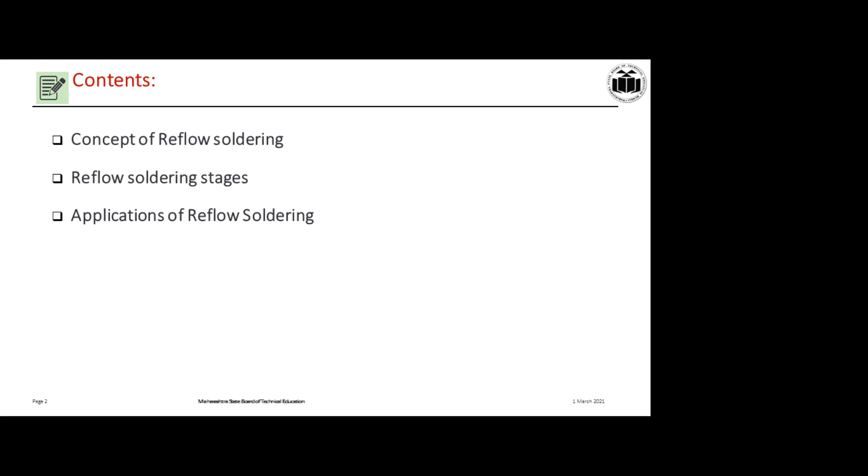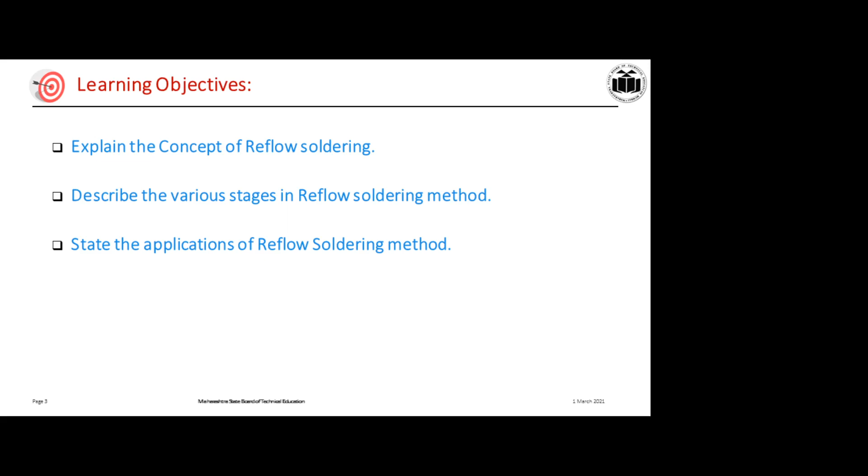Now in this presentation, we will see the contents as concept of reflow soldering method. Second, we will see the various stages in the reflow soldering method. And third, application of reflow soldering method. Now here are the learning objectives of this presentation. Here we are going to explain the concept of reflow soldering. Second, we will describe the various stages involved in reflow soldering method. Third, we will describe or state the applications of reflow soldering method.

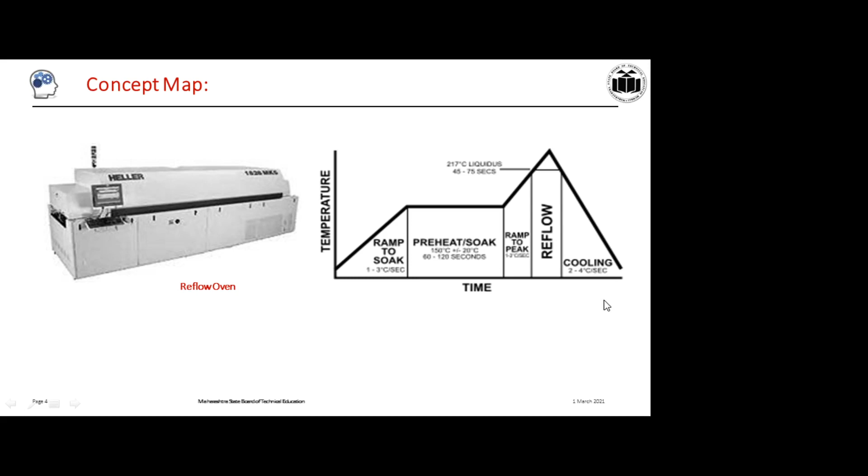Now here is the concept map. What is actually the reflow soldering? Now this reflow soldering is carried out by using the reflow oven. So at the right hand side you can see the graph of time versus temperature. So this will indicate the various stages' temperature for the reflow soldering method when we do this with the reflow oven. So there are 5 different stages in the reflow soldering method by using the reflow oven that we will see next in detail.

So what is the reflow soldering? It is the most widely used method for attaching the surface mount components on the PCB. It provides reliable soldering for a huge variety of components and pad sizes, while being easy to monitor and control. Infrared reflow soldering has been used for many years in PCB assembly areas. Now it is able to provide very high quality soldering by using this reflow soldering method, which is the need of today's electronic production area.

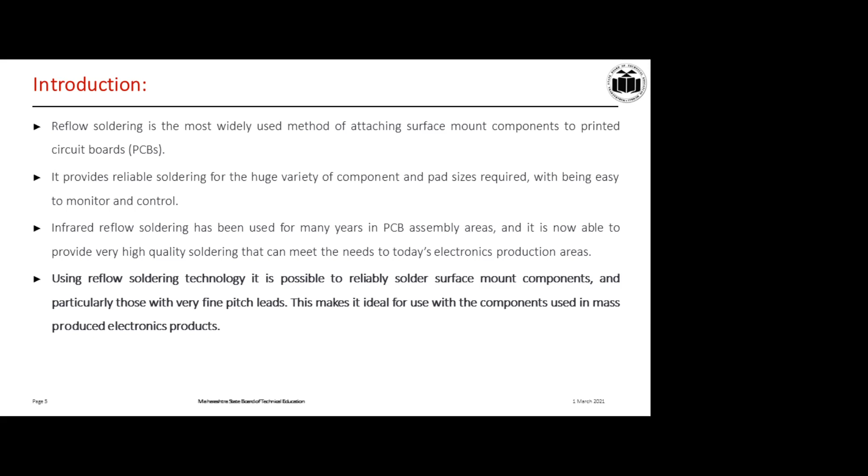Using reflow soldering technology, it is possible to reliably solder the surface mount components, particularly those with very fine pitch leads. This makes it ideal for use with the components used in the mass production of electronic components.

So these are the requirements of the reflow soldering process. So what are the key aspects? The first is a suitable machine. So to get the effective reflow soldering process, the first requirement is that we have to deal with the suitable machine. Second, acceptable reflow profile. Third, a PCB or component footprint design is required. Fourth, carefully printed PCB using the well-designed stencil. So by using a well-designed stencil, you can go for the reflow soldering method.

Fifth, repeatable placement of surface mount components. And the sixth, good quality PCB components and the solder paste. So these are the basic requirements of any reflow soldering process. We need to get these requirements satisfied.

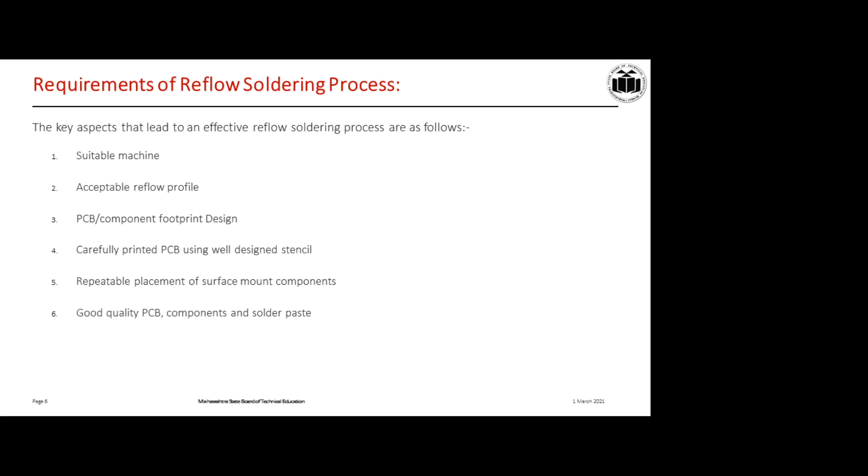Now let us see what are the various stages in this reflow soldering method. So there are various types of reflow soldering machines available depending on the required line speed and the design or the material of the PCB assembly to be processed. So based on that we can select that particular reflow soldering machine. Now let us see what are the different stages in this reflow soldering method.

So the first stage is the preheat. Now what is the need of this preheat stage? Here the board needs to be brought steadily up to the required temperature. The board is the PCB board. So we have to maintain the temperature for that particular PCB board. If the rate is too high, then the board or the component may be damaged due to thermal stress. So we have to be very careful. If the board is brought to the temperature too slowly, then the board may not reach the required temperature. So in preheat, the accurate temperature condition has to be satisfied.

The second step is the thermal soak. Now when the board has come up to the temperature, it next enters the thermal soak area. So here the temperature is maintained for 2 reasons.

So in the thermal soak, one purpose is to ensure heating of the areas that are not adequately heated because of the shadowing effect. For that we have to keep the PCB board in this thermal soak region for a particular time at a particular temperature. The other is to remove the solder paste solvents or volatiles and to activate the flux. This thermal soak is the second stage, and it is a very important stage.

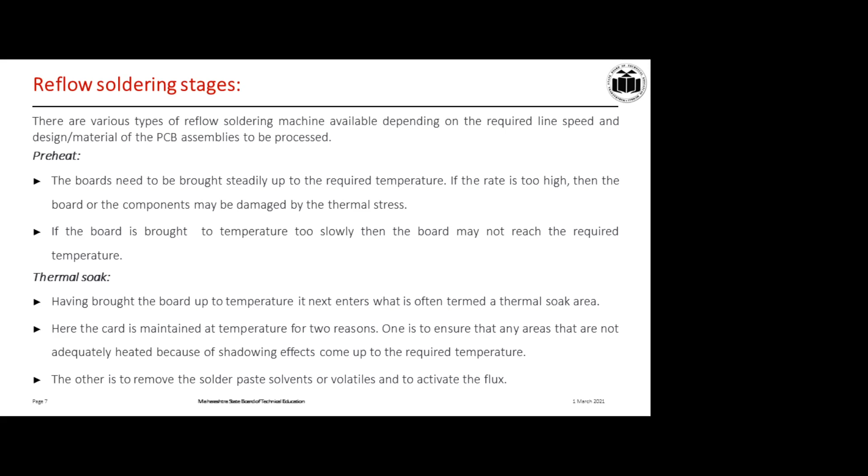Now the third stage, reflow. The reflow area is where the soldering process is done, at the highest temperature reached. At that time, the solder melts due to this high temperature, and it creates the required solder joints between the PCB and the surface mount component. Thus, the actual reflow process involves flux reducing the surface tension at the junction where the metal has to accomplish a metallurgical bonding, allowing the individual solder powder spheres to combine and melt, and the component to stick on the PCB.

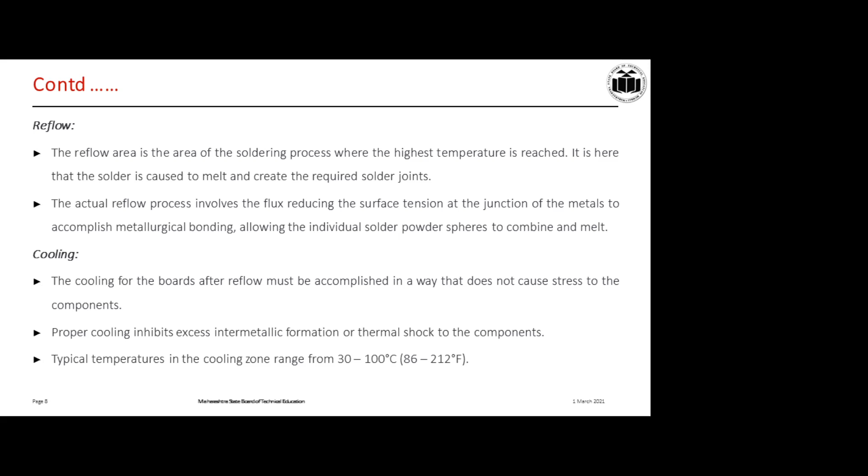Now the next stage is the cooling stage. In this region we have to keep the PCB boards after the accomplishment of the reflow, so as not to cause stress to the components due to the very high temperature. We have to allow the temperature to come down to the proper cooling level. Proper cooling inhibits excess intermetallic formation or thermal shock to the components. The typical temperature range in the cooling zone is between 30 to 100 degrees centigrade, or 86 to 212 Fahrenheit.

So this is a typical reflow oven temperature profile. The first stage is ramp to soak, where the temperature slowly increases at 1 to 3 degrees centigrade per second. After that is the preheat or soak zone, where we have to keep the PCB board for 60 to 120 seconds at a temperature of 150 degrees centigrade plus or minus 20 degrees centigrade. After the preheat zone comes ramp to peak, where again we slowly increase the temperature at 1 to 3 degrees centigrade per second.

Then the reflow, where the actual soldering of the SMC component on the PCB board is done. At that time, the temperature has to reach 217 degrees centigrade. That is the reflow; soldering will be done at this temperature. After the soldering of the component on the PCB is done, we have to allow cooling, at 2 to 4 degrees centigrade per second, until the temperature is reduced to the required range of 30 to 100 degrees centigrade.

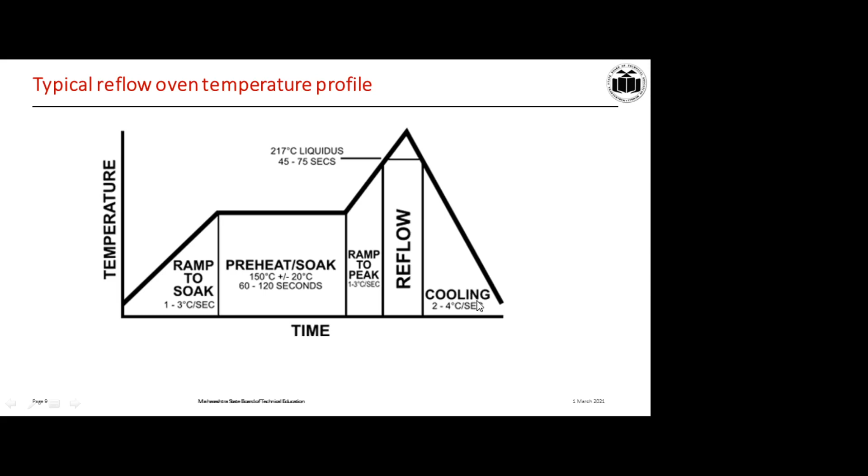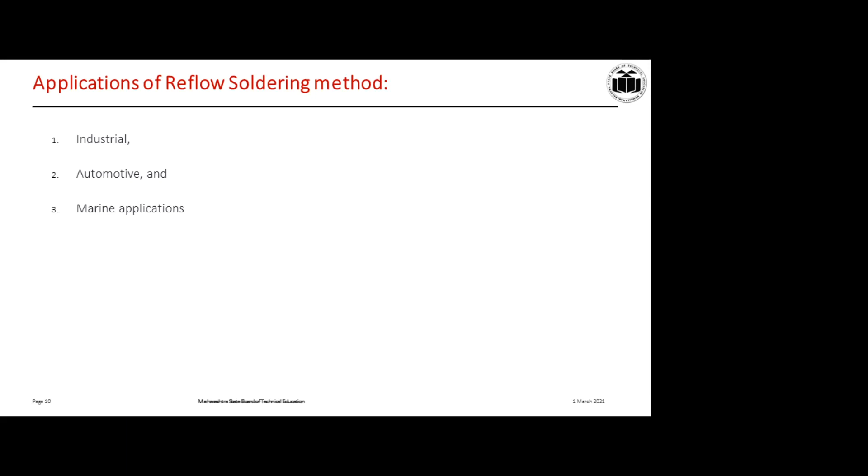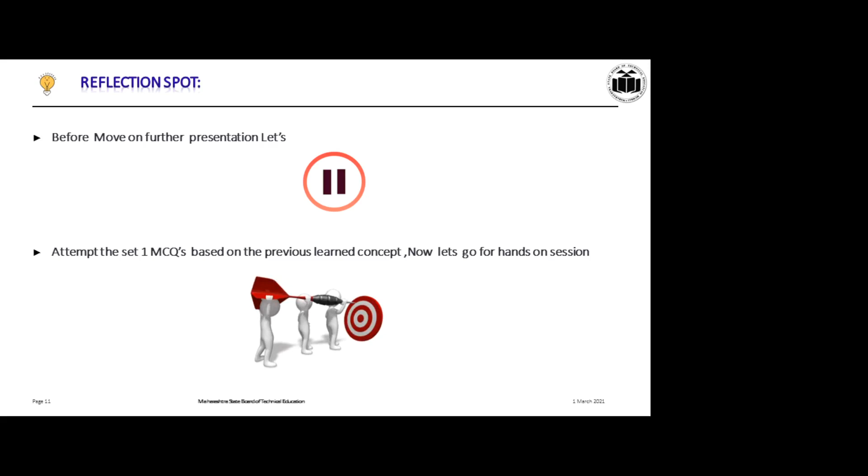So here is a quick recap of the concepts we have learned. Reflection spot: before moving on with the further presentation, let's pause a while and attempt the set 1 MCQ based on the previously learned concepts. Now let's go for the hands-on session and solve the set 1 MCQ.